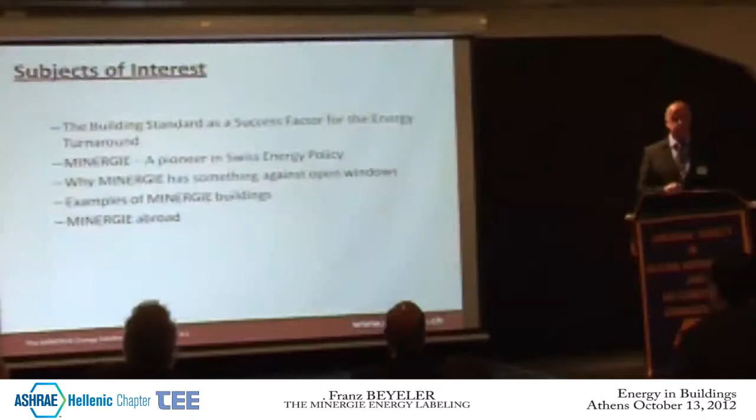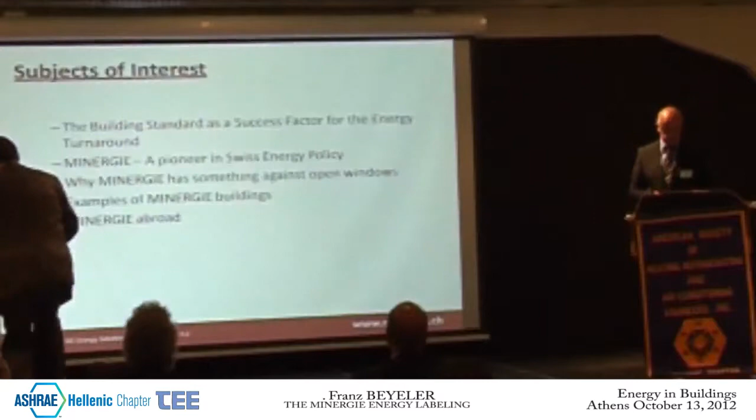What I want to talk to you about is the building standard as a success factor to the energy turnaround. Mr. Walter Steinmann was talking about all the work we have to do about the turnaround. And as we learned, 50% of the energy consumed in Switzerland is consumed by the buildings. Minergie was introduced in '98, 14 years ago, and is a pioneer in Swiss energy policy. I'm going to talk to you about why Minergie doesn't like open windows, and of course I'm going to show you a few examples of Minergie buildings, and I will talk to you about Minergie International.

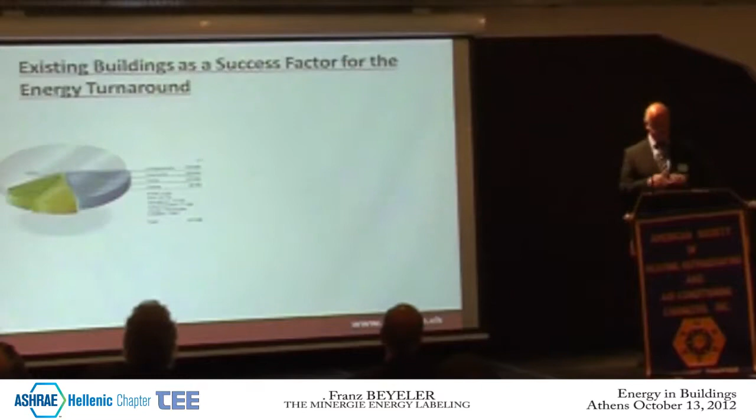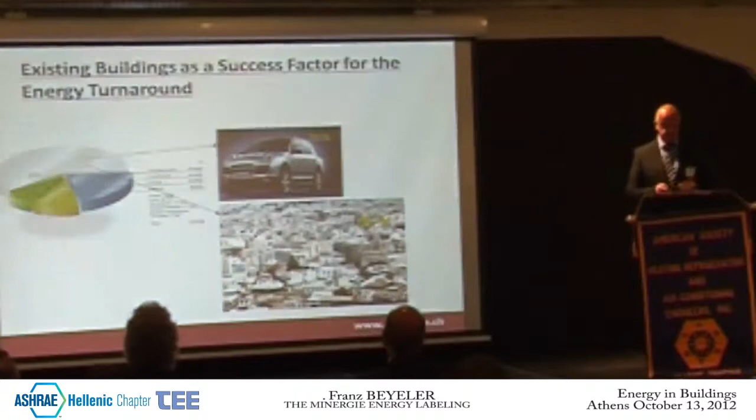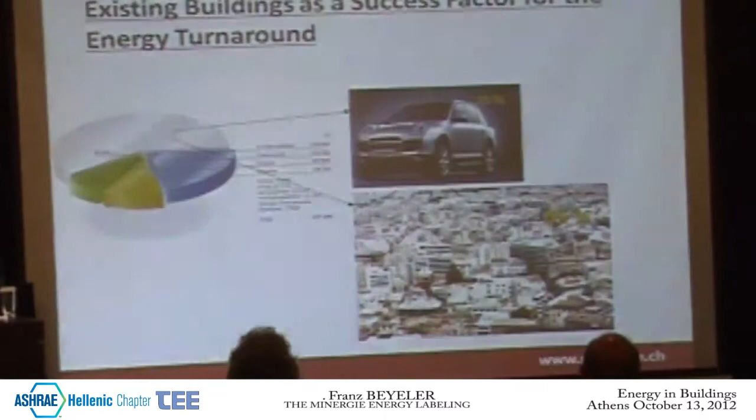You have seen a similar graphic by Mr. Walter Steinmann. That's the total consumption of energy in Switzerland. Of course we are using energy for our cars, for our planes, but the main part of the energy consumption is used in buildings, and it's a little less, as I have learned by the slide of Mr. Papadaniel. In Greece, it's about 25 to 30%, because of course you have a bit nicer climate. But in Switzerland, as we have heard, it's about 50%. And there we can do a lot of improvements.

We can improve the energy efficiency very easily. I'm not going to talk about the climate problem because we know we have a problem, and what we are doing to the climate, I don't know what is going to happen. But of course this picture says enough.

Some 30 or 40 years ago, in the 70s, we were allowed in Switzerland to build bad buildings as far as energy is concerned. We were allowed to use 22 liters of heating oil per square meter and year. Then the cantons said we are using too much energy in the buildings, so we have to improve this. And then they said we go down in the 90s to 12 liters per square meter, and then in the year 2000 down to 9 liters per square meter.

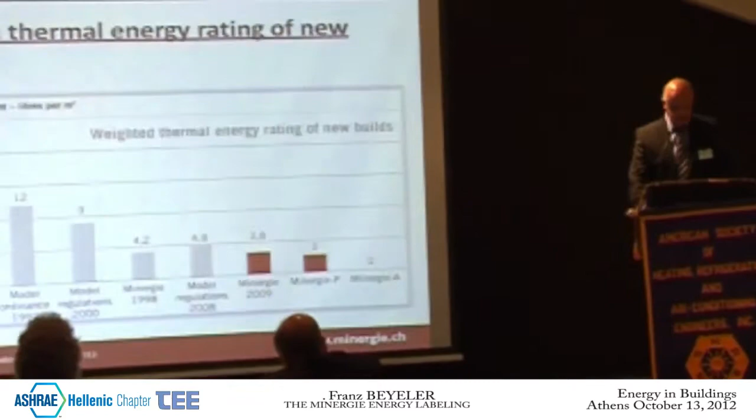And because Minergie was introduced in 1998 with a figure of 4.2 liters per square meter energy consumption in a house, the cantons said we are going down, we are improving our law, and we are asking for a new figure of 4.8 liters. Minergie - when you build nowadays a Minergie house, you can do this in the basic standard, and then you are allowed to use only 3.8 liters, or you do a passive house or a Minergie P house, which can use only 3 liters, or 30 kilowatt hours for heating, warm water, and cooling.

Last year we did introduce, as the first organization worldwide, a clear plus energy standard - with Minergie A, we have introduced the plus energy standard. And up to now, we have certified about 200 buildings according to the toughest, newest standard, Minergie A.

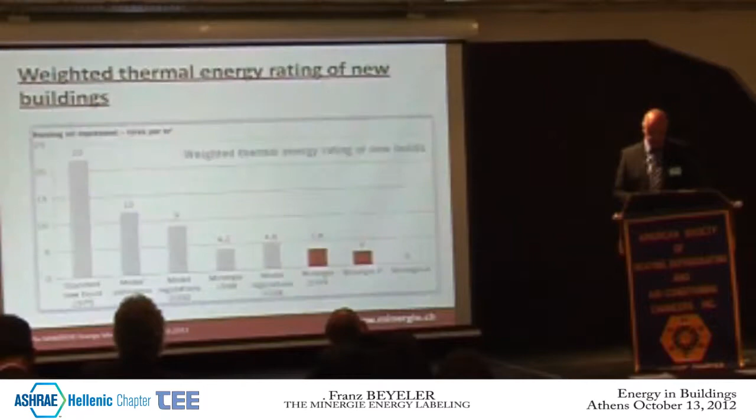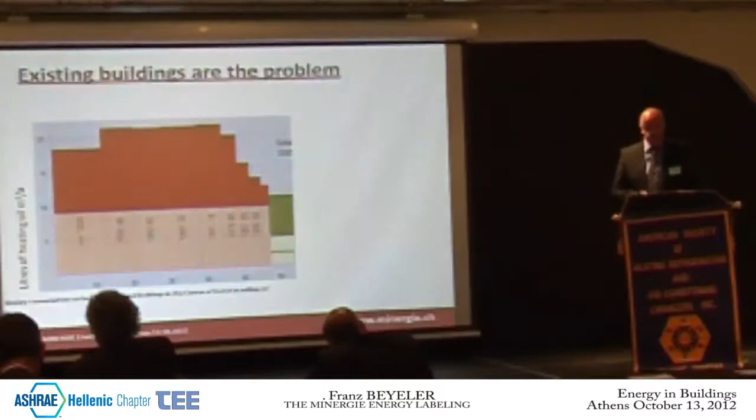To show you the problem in Switzerland - and it's exactly the same problem in Greece or in other countries all over the world - we have a lot of old buildings using far too much energy, 22 liters or even more per square meter. And there we have a lot to do.

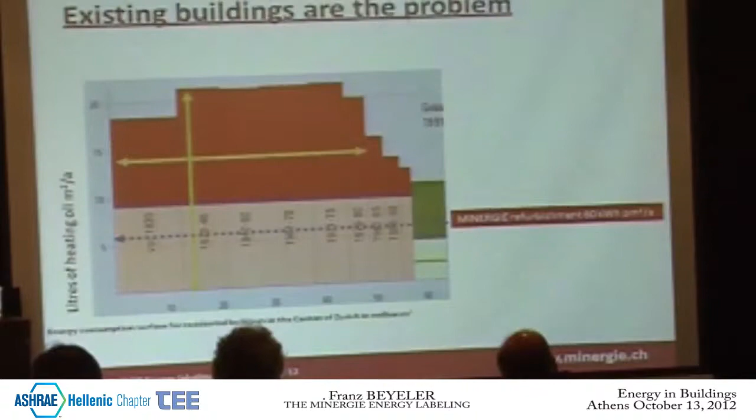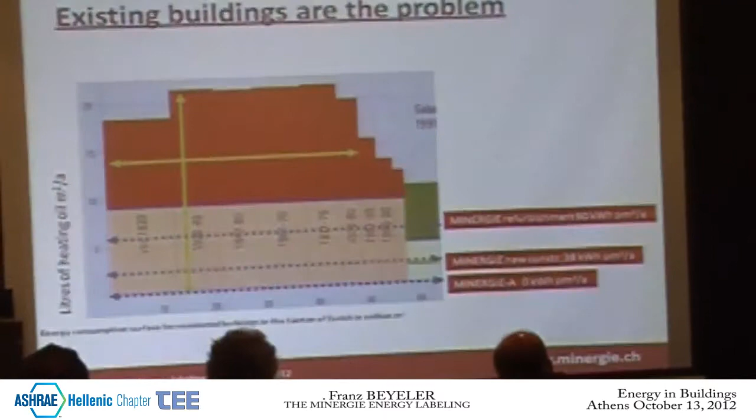When you renovate such a building according to the Minergie standard for renovation, then you are allowed to use 6 liters. That means you improve the energy efficiency by a factor of 3 or 4, and that's of course a hell of a lot. Or when you realize the building in the new standard, of course, as you have learned, 3.8 liters, or as I said, nil - zero energy or plus energy buildings.

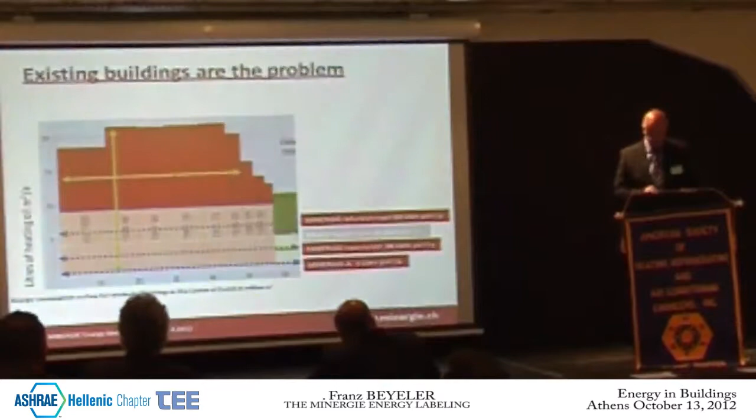And about 80% of the buildings in Switzerland should be renovated, 1.5 million buildings, as you have seen on the slide by Mr. Steinmann. What is Minergie?

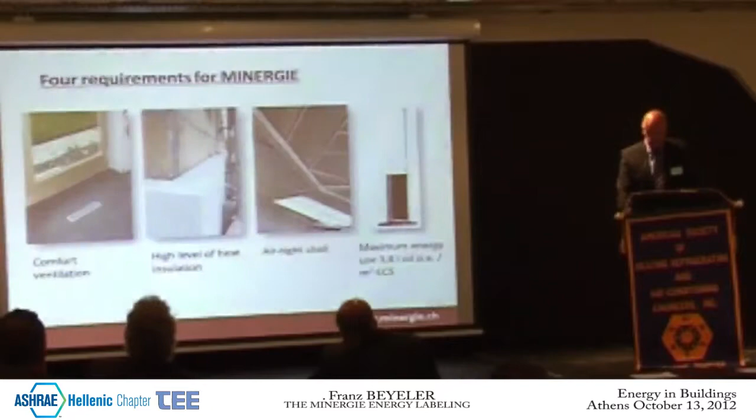Minergie is a very straightforward standard. It's very easy to realize a building which is using only very little energy, 3.8 liter heating oil or 38 kilowatt hours energy. That means you have to have good insulation.

And of course, the building should be pretty airtight. That's quite important. And of course, to improve the comfort and the energy efficiency, we are asking for an air changing system. It's not air conditioning like this one, which makes a hell of a lot of noise and uses a lot of energy. It's an air changing system. We are talking of a comfort ventilation.

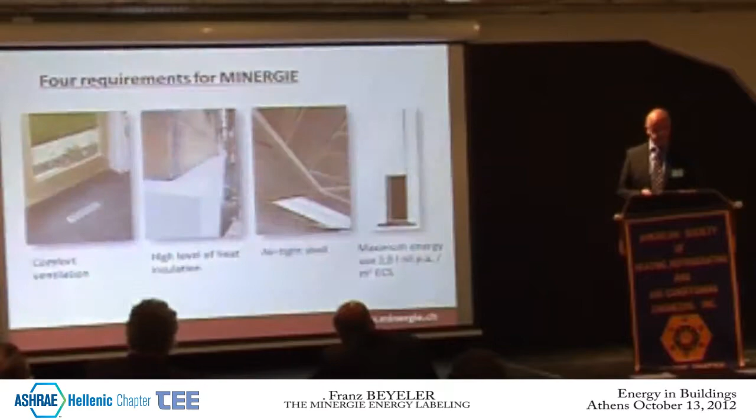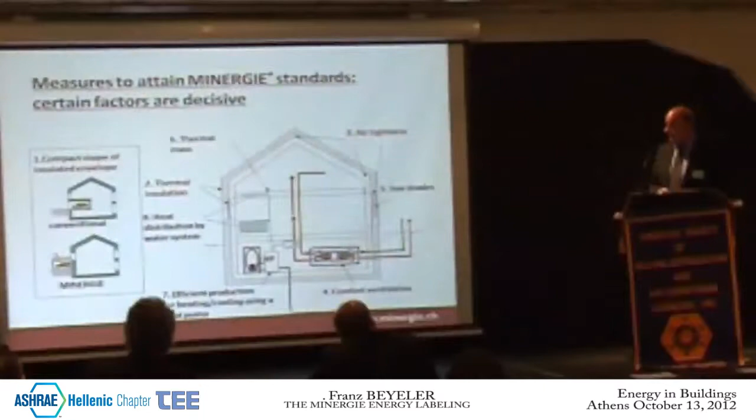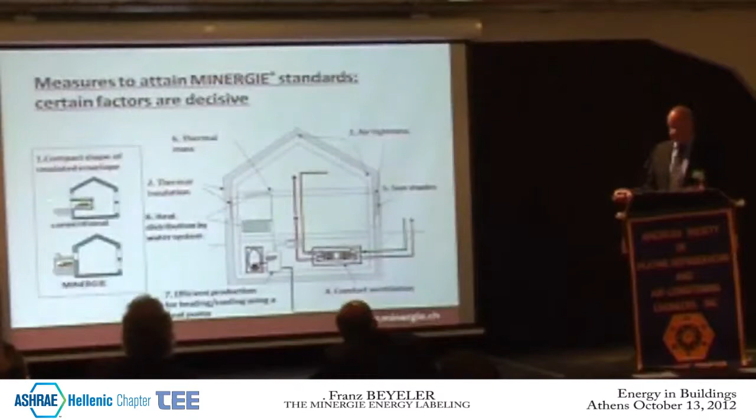These are the main measures to attain Minergie standard. You should have a good building, and of course it should be pretty compact, as presented here. That's a conventional building, and it's very difficult to realize this as an energy efficient building.

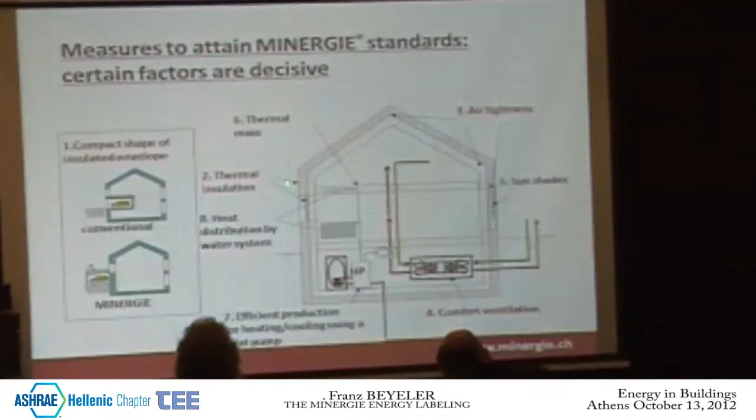Then of course you have to have a very good insulation, protecting you against the heat and the cold. And in Greece, we are talking mainly about protecting you against the heat. Therefore, we are asking for sunshades. When you want to have nice climate during summertime in Athens, you need a proper professional sunshade system. And of course, as I said, it should be pretty airtight.

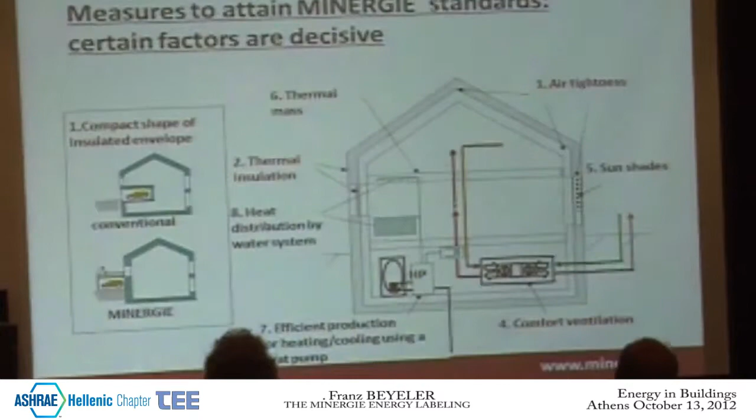And then, of course, we are using in Switzerland, in the new building sector, mainly heat pumps, working with air as the energy source or working with the earth as an energy source. And the heat distribution is made mainly by water systems. That's actually the normal way to heat in Switzerland. And as I said, we are using comfort ventilation with heat recovery integrated.

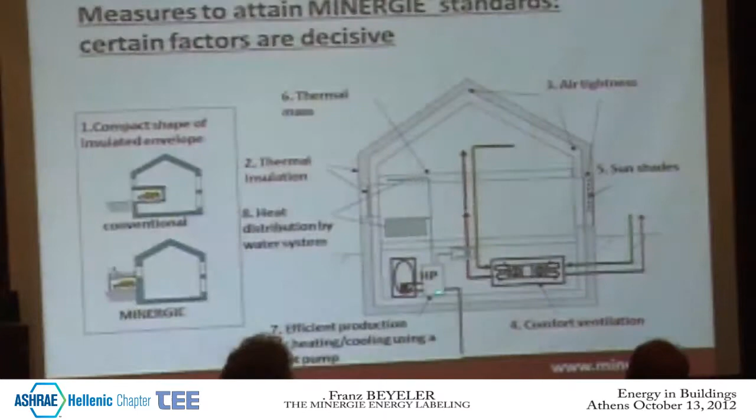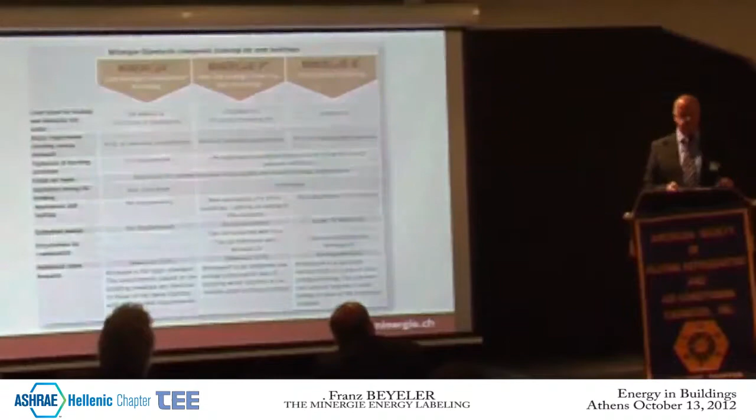That's a slide with the explanation of the 3 standards of Minergie. We did start in 1998 with Minergie, the basic standard. That's for low energy consumption buildings. And then we did realize in 2002 Minergie P, which maybe you are knowing as the Passivhaus standard. It's almost a similar standard as the Passivhaus standard, Minergie P for very low energy consumption buildings.

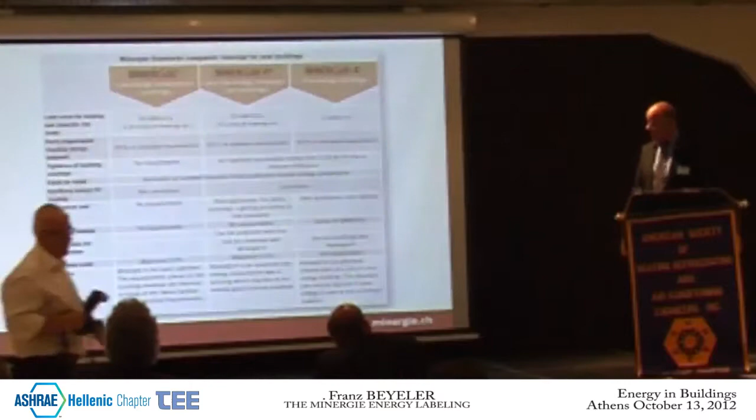And then, as I said, in March last year, we did introduce Minergie A as a plus energy building standard. In the EU, we are talking about nearly zero energy buildings, and Minergie A, of course, is a zero energy building standard or a plus energy building standard. And as I said, we are asking always for an air changing system.

And all the standards can be improved with Minergie, can be combined with Eco. Eco stands for healthier construction materials, and of course daylight use and all that sort of recycling materials, all that stuff.

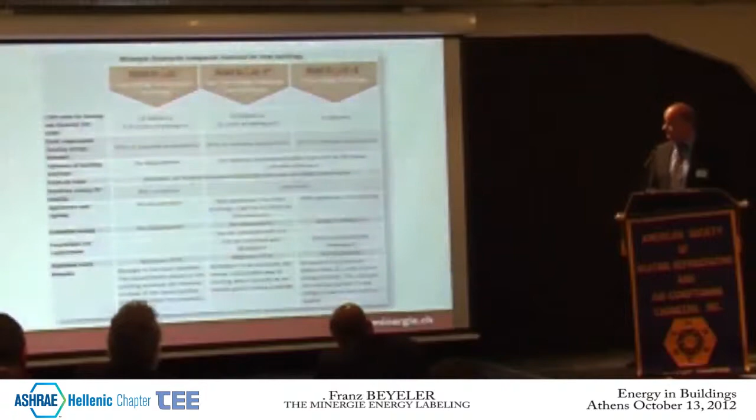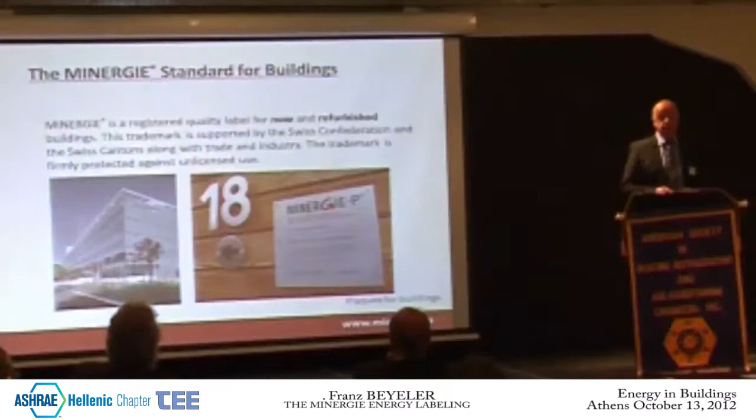The Minergie standard for a building, of course, can be seen when you enter a building, because all the buildings - and up to now we did certify in Switzerland and around Switzerland about 26,000 buildings: office buildings, villas, school houses, all sorts of buildings - each building has a plaquette with a number on it from the canton and then a following number. That means you can visit all the buildings on our website and see what sort of heating system is in that building.

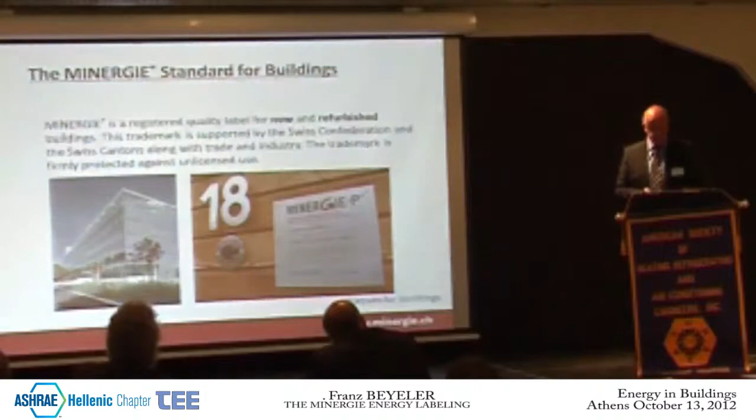Why doesn't Minergie like open windows? I had a nice room in a hotel last night on a very busy street, just opposite the House of Parliament. And I was happy that I could close the window and had air conditioning, because it's very, very noisy 24 hours a day. And when you open the windows to get fresh air, you get a lot of noise into your office or into your bedroom. And in Switzerland, we are talking about 60% of the population having a noise problem.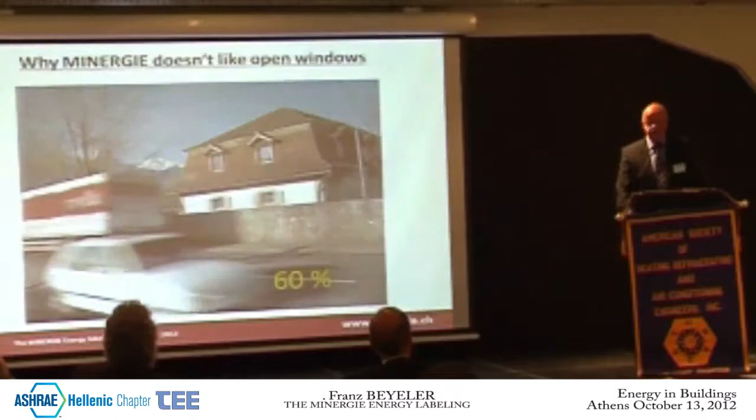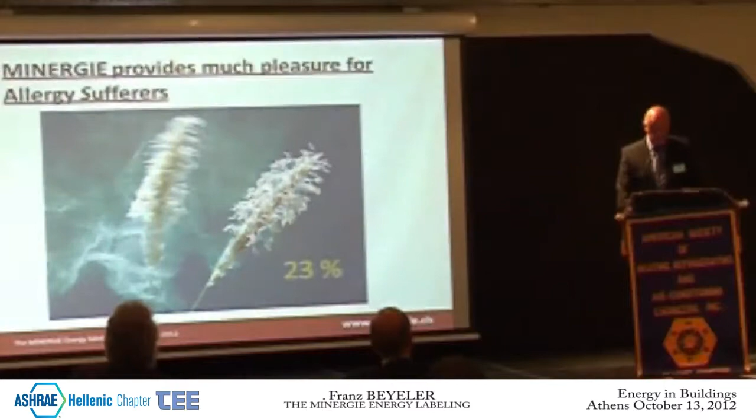That's why we are asking for air changing systems, so you don't need to open the windows. About 23% of the population in Switzerland have allergy problems, pollen problems, and it's the same - open windows and you have the problem in your room. Or the humidity problem: when you are taking a shower in the morning and all the members of your family are taking showers and then you leave your house, maybe when you come back you have such a situation in your bathroom. That's another point. That's why we are asking for an air changing system.

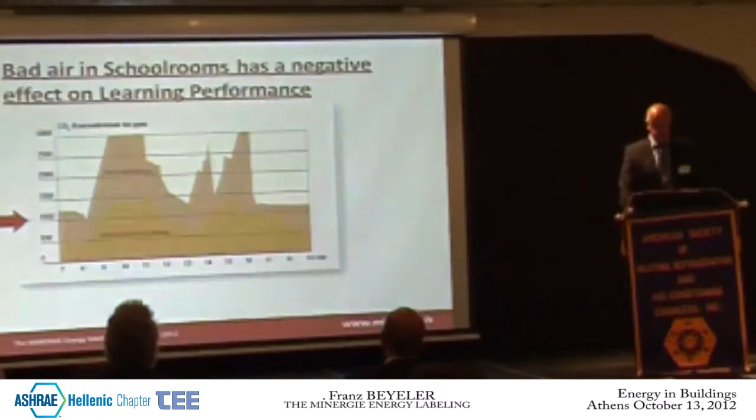In rooms like this one, a lot of people are breathing and producing CO2, and that's a big problem in schools. The kids are breathing and producing CO2, and the windows should be open all during the lessons, but you can't, because of the noise or because it's too cold or too warm. That's another point for the air changing system for comfort ventilation.

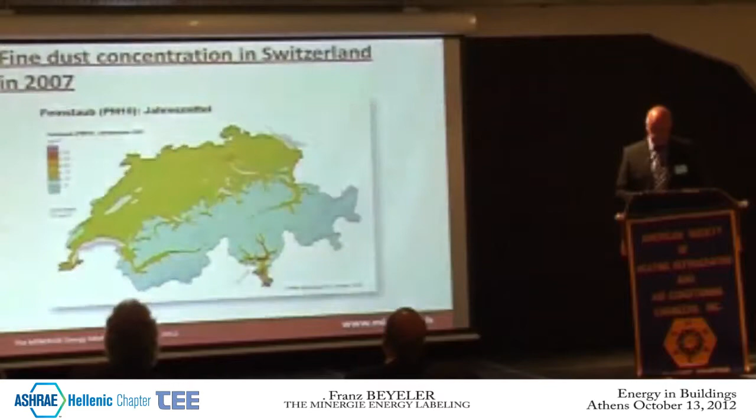Fine dust concentration can be pretty high in Athens as well, I could imagine, and in Switzerland. All the places where we live, where we travel by car, where we produce heat by fossil energy, there we produce fine dust, and fine dust gets through the window into your lung, and that's not what we want.

Such situations you can see all over the place during summertime. When you open the window in summer and it's 40 degrees in Athens, the heat gets into the room. And of course in Switzerland we do have sometimes snow, like in Athens as well sometimes, and then of course you have a problem with the temperature in your house.

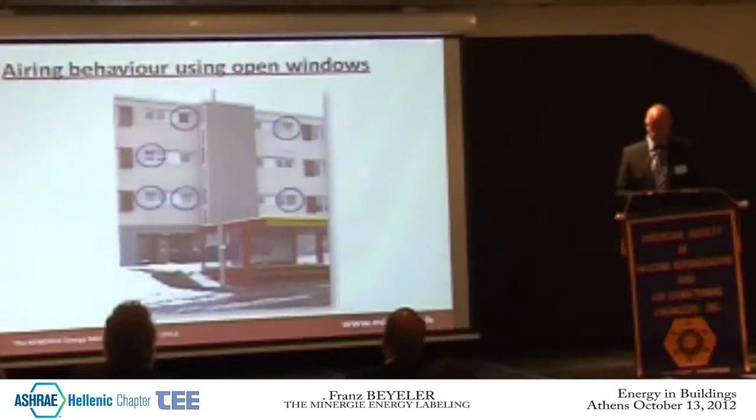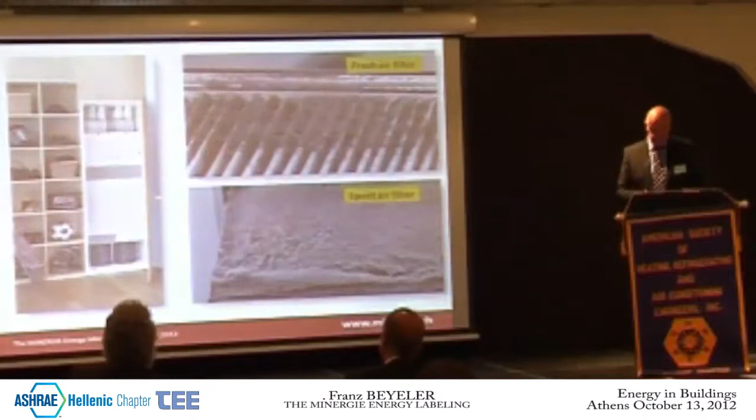We are using in Switzerland air ventilation systems like this one, a single installation for one flat, or you have a central system for big houses with a lot of flats. You have central systems mainly down in the cellar. And of course you can always open the windows.

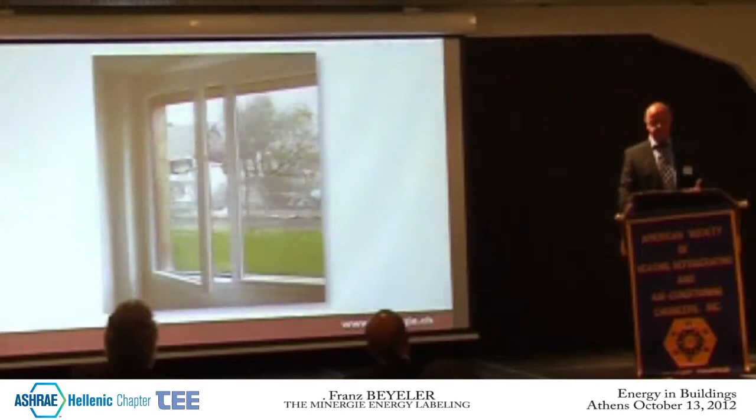You don't have to open the windows to get fresh air, but you can. That's very important, because a lot of people say in Switzerland, Minergie, that's okay, but I don't like not to be able to open the windows. That's wrong. You can always open the windows, and that's pretty important.

And of course, the benefits for the owners and for the residents and even for the investors is clear. We want to have a high level of comfort in our houses and in our offices. And of course, the temperature shouldn't go up and down, up and down. It should be all day long, 24 hours a day, almost the same level.

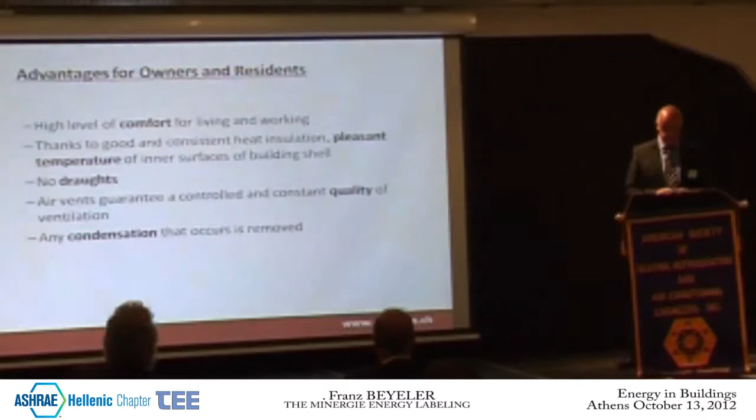And the humidity problem, as I was showing a picture, of course, is another point, that you have 24 hours, almost the same humidity. And then, of course, no condensation occurs, and the noise problem I was already mentioning to you.

I'm going to show you a few buildings. All of the buildings are certified according to Minergie. On top of the Klein Matterhorn, about 4,000 meters altitude, there is a restaurant certified according to Minergie, and this villa in Saint-Tropez is certified according to Minergie. That means Minergie can be carried out on top of the Klein Matterhorn or down in Saint-Tropez. Or this very famous and very modern cabin in Monte Rosa Massif, close to Zermatt, is certified according to Minergie P.

But we are certifying other buildings as well. This West Side complex, shopping and wellness - the architect was Daniel Libeskind. It's a very huge center in Bern, certified according to Minergie. Or this villa, modern villa, constructed in wood. Or the highest building these days in Switzerland, the Swiss Prime Tower in Zurich, has been certified according to LEED and has received the Minergie certificate as well.

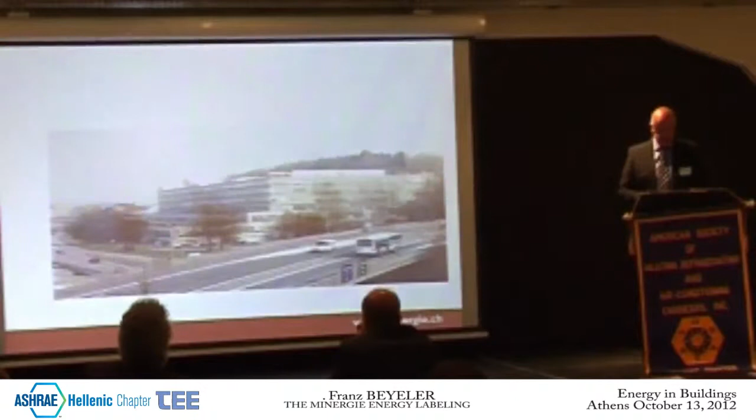Or this Rolex Learning Center - our colleague from Lausanne may know this place because he's a professor there. It's a very famous building; the very famous architect SANAA from Japan is responsible for the design of this building. Flats in Zurich, or the old headquarters of Swissair has been renovated according to Minergie - nowadays it's a very modern business center close to the airport in Zurich. The Swiss Army Library, an old building as well, is renovated according to Minergie.

With all these pictures, I'm showing the possibilities of certifying buildings according to Minergie.

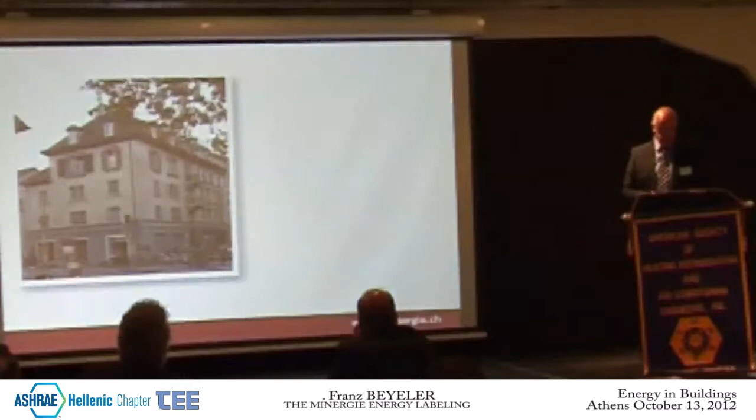3 flats in such a nice house, close to the road, a lot of noise, a lot of dirt, and of course with the air changing system you have a comfortable home afterwards. Or this very old building in the town of Zurich has been renovated, and now it looks nicer than a very new building.

A very tall building in Bern has been close to the motorway. The people living there weren't happy with the noise. Nowadays they sleep very well because they don't have to open the windows, and they spend much less on energy because consumption in this building has dropped from 21 liters per square meter down to 6 liters, an improving factor of 3.

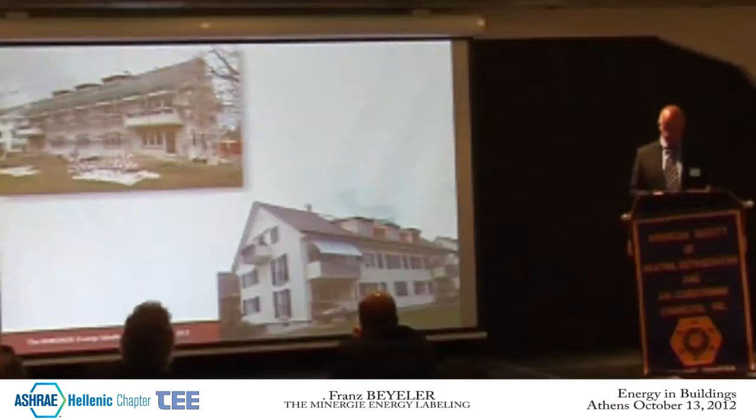Such blocks of flats we have a lot in Switzerland, and of course when all these buildings are renovated according to Minergie, we would achieve the figures we learned from Walter Steinmann.

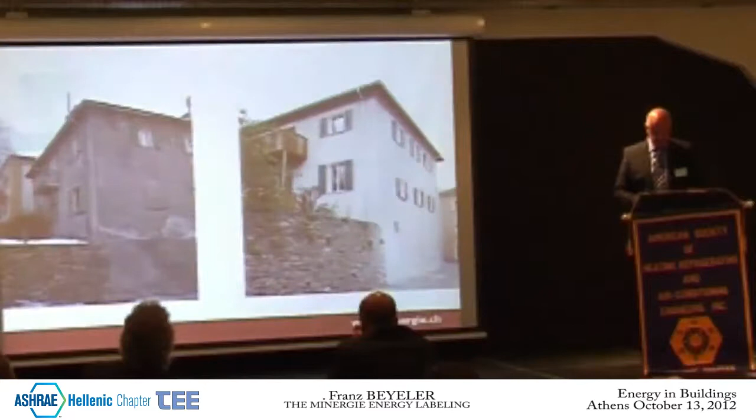This building in brick is quite interesting. External insulation couldn't be carried out, so the building is insulated inside. Nowadays it looks very nice, with very good comfort for the people living there.

Before and after the renovation, the family living in this place had problems with humidity. Behind the fridge they had this nice mold, champignon, Pilze. And because of the oil heating, they had a problem with oil, it was smelling all over the place.

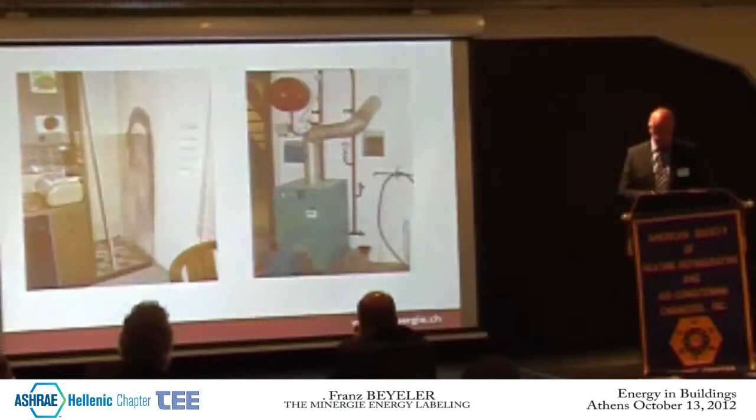So they installed a heat pump using the air as an energy source, producing heat for the heating system and for the hot water. Here you see the air ventilation system with the filters. Nowadays the family living in this place is very happy.

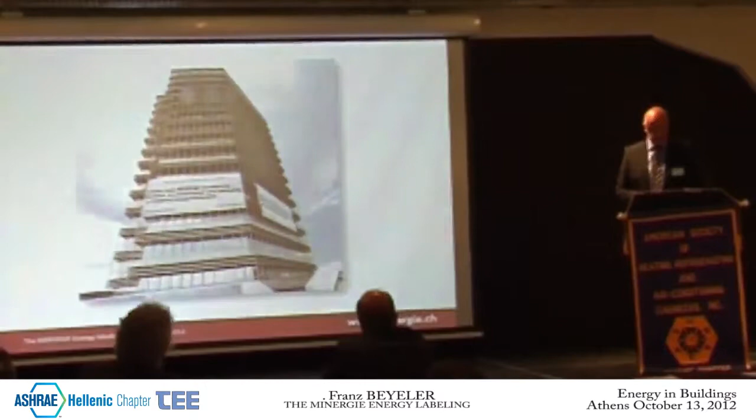The headquarters of the biggest food and non-food distributor in Switzerland, Migros, has been renovated according to Minergie, and the people working there nowadays are very happy.

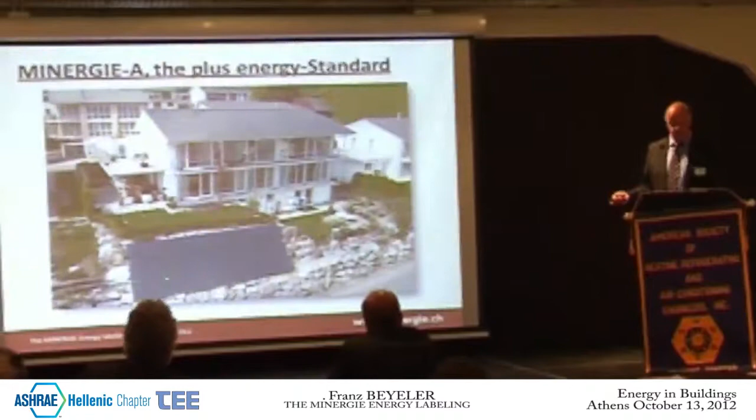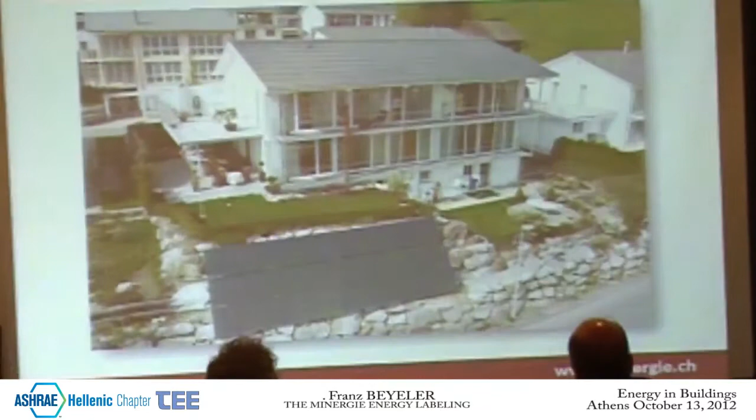To show you two buildings certified according to Minergie A: this house in Schwyz uses a solar collector to produce hot water for the kitchen and bathroom, and to support the heating system. On the roof there's a fully integrated photovoltaic installation to produce electricity. This building produces 100-200% more energy than it uses throughout the year, and such installations are carried out quite often nowadays, fortunately, for our energy turnaround.

Another building certified according to Minergie A is a single family house with a photovoltaic installation on the roof and solar thermal for the hot water.

Minergie is not only a chance for the people living in such a place, it's a chance for industry and trade as well. I'm going to show you a few pictures.

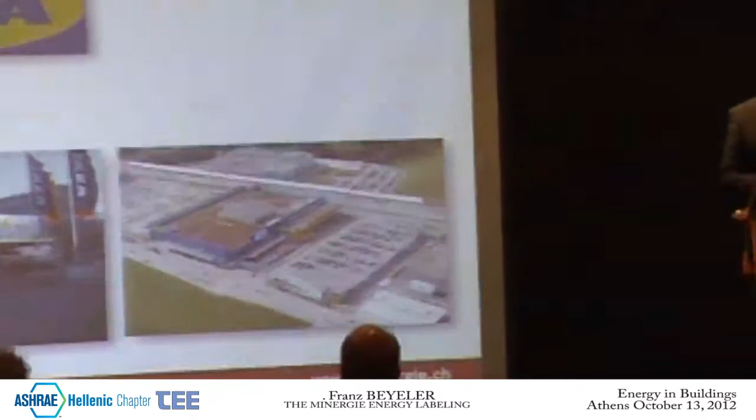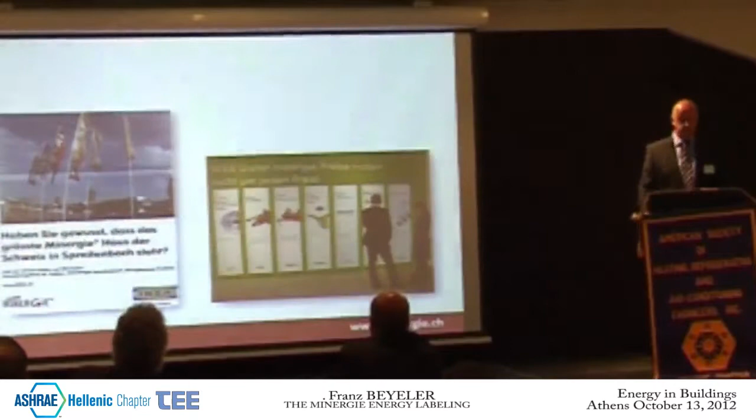IKEA, the Swedish company, has all its buildings constructed in Switzerland certified according to Minergie, and IKEA promotes the Minergie standard to the consumers and clients entering the shops.

Wicona, belonging to the Hydro concern, does promotion with the Monte Rosa hut.

When you build in Switzerland according to Minergie, you go to the bank and get better mortgage rates, that's quite important. You go with the certificate signed by the canton, and a lot of banks in Switzerland provide cheaper mortgages.

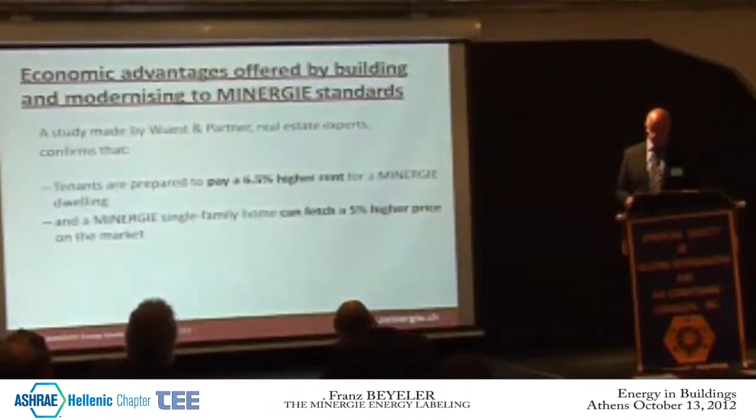Wüst und Partner, a real estate expert, says people renting a Minergie flat are prepared to pay 6.5% more, because they expect better quality and comfort, which is very interesting for the investor.

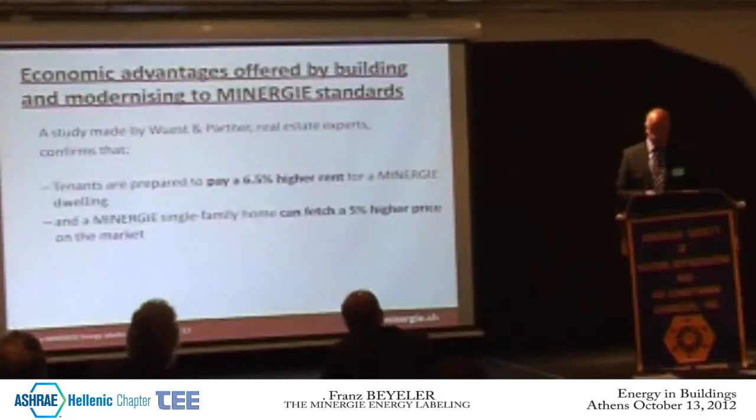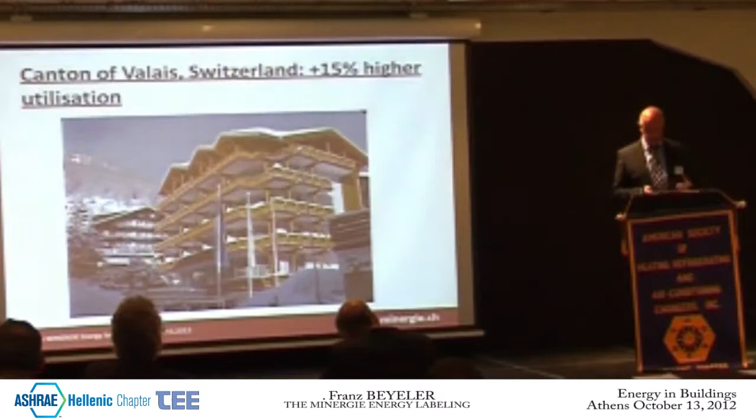The canton of Wallis introduced a good idea already in the 90s: when you realize a hotel like the Walliserhof in Saas-Fee and certify the building according to Minergie, the canton allows you a higher utilization by 15%. That meant 110 square meters more rooms for guests in this place, and because the ground is very expensive, that's very interesting for the investor.

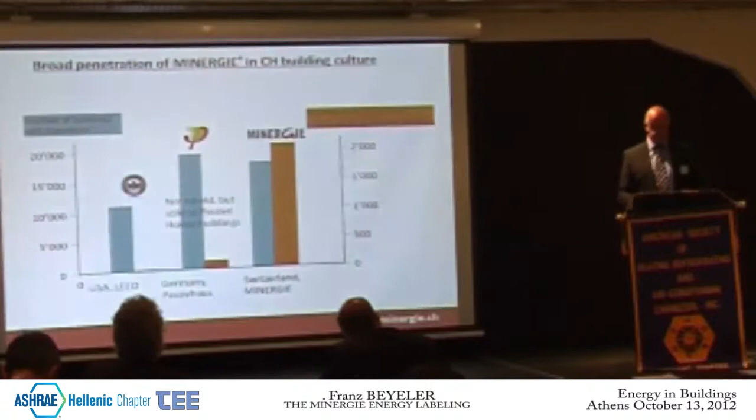To get an idea comparing Minergie with LEED or the Passive House standard, Minergie has a very broad penetration in Switzerland. As I said, we have certified up to now about 26,000 buildings, and it's important for our economy as well.

Up to now, we have about a market share of 25% of the new buildings realized in Switzerland certified according to Minergie. Minergie buildings use much less energy than other buildings, so we are reducing CO2 emissions by about 300,000 tons per year.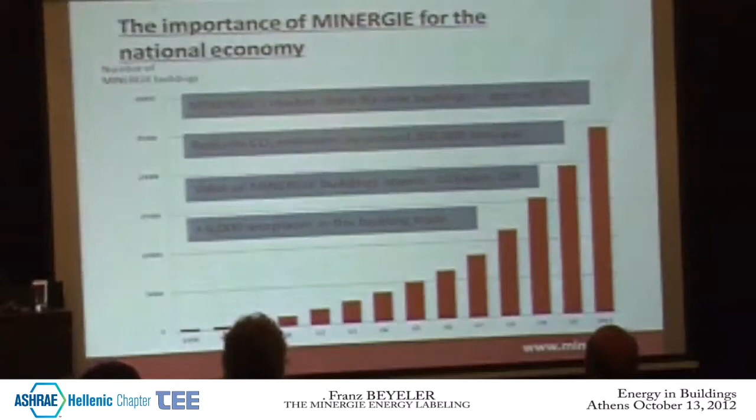Buildings certified according to Minergie are easier to sell and better to run, and the reflecting value is about 60 billion Swiss francs. As the Federal Office of Energy worked out, about 6,000 workplaces in the building trade have been created because of Minergie.

Why is Minergie successful? It's quite clear, because it's clear, it's simple, and no one has to build a building according to Minergie, but more often it's been done.

We want to provide the people living in a Minergie house more comfort, and we work together with the Federal Office of Energy, with the cantons, and with a lot of architects and investors. We also have a professional communication system and marketing, which is quite important.

Just a few slides on a new period for Minergie: we are going to found Minergie International Limited to export Minergie, maybe to Greece one day.

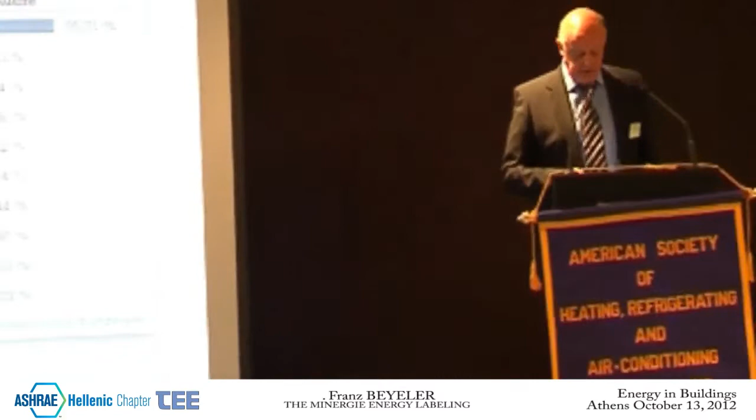Every day a lot of users visit our website minergie.ch. German people, French people, and all sorts of people use our website, and we have a lot of visitors from Japan or China. They are interested in Minergie, but up to now we didn't have the possibility to certify houses in Japan or Beijing. These houses were built according to Minergie, but without a certificate.

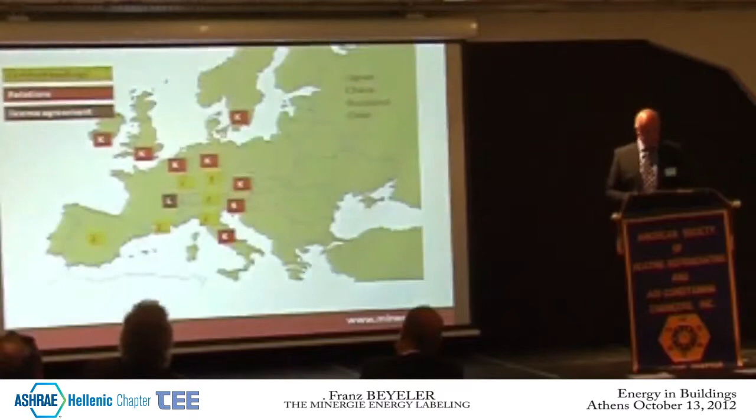We have certified buildings all over Europe according to our standard, but up to now we only have a licensed partner in France. This partner carries out Minergie according to our concept and certifies buildings in France accordingly. We are now on the way to founding Minergie International.

I'm quite sure we are going to talk again with Mr. Papadaniel and his colleagues about Minergie Greece. Thank you.